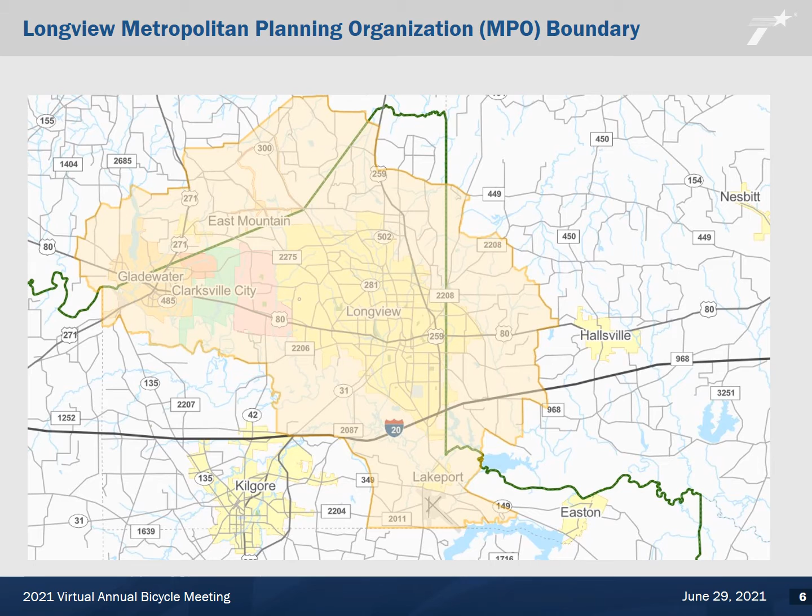So let's start with some projects in our district that are actually under construction, and then we'll move on to some that are being developed or designed.

This first project is in Bowie County, in the Texarkana MPO boundaries in the city of Texarkana, on Summerhill Road. It is a sidewalk project under construction, with limits extending from US 82 to West 10th Street. The description is to construct sidewalks. This project is near completion; it was let in December 2019, and we're currently doing the punch list and completing the project, so it should be fully functional soon. The length of this project is 0.585 miles. We have 2 more projects in Texarkana that we'll move on to next.

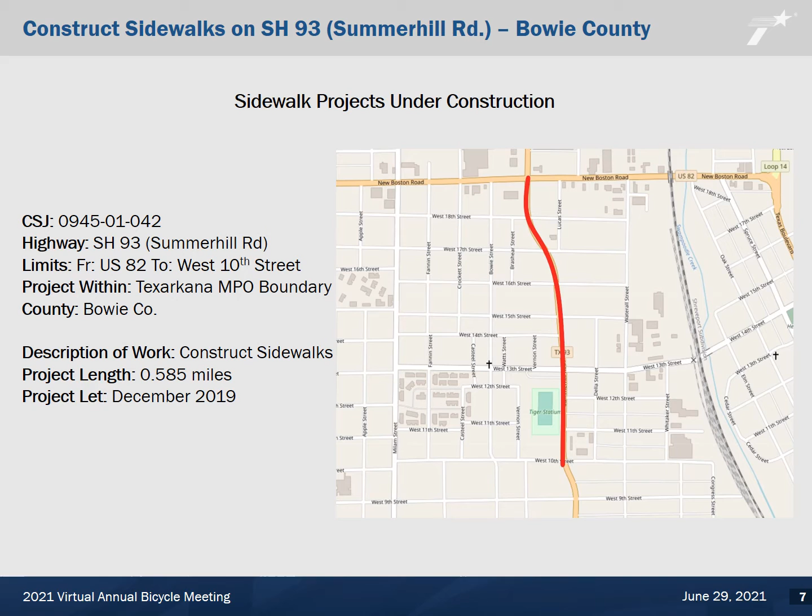This is the second project in Texarkana, also on Summerhill Road. It is under construction to construct sidewalks, again within the Texarkana MPO boundary. This project extends from Meadow Lane to Kennedy Lane and is 0.616 miles long. It also let in December 2019 and is very near completion, with punch list activities underway to make sure everything's taken care of before it becomes fully functional.

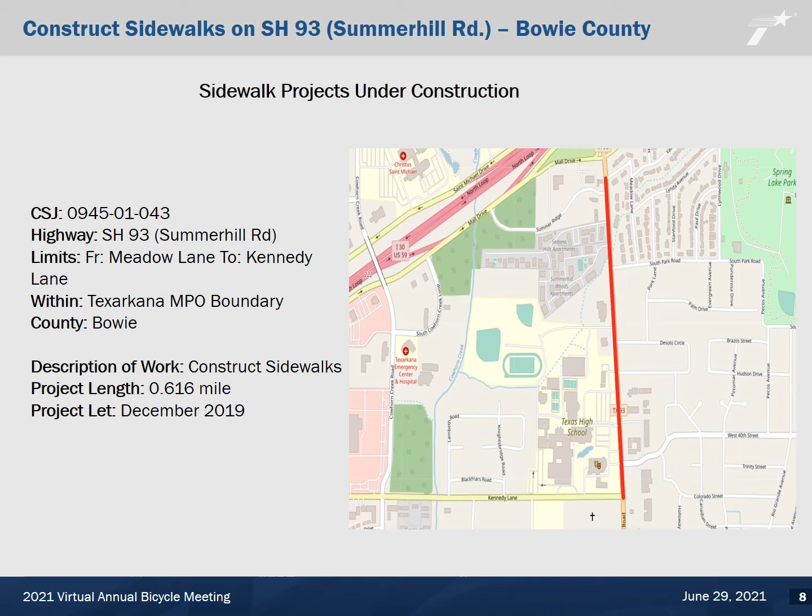Okay, this is the last project we have under construction in Texarkana in Bowie County, again in the Texarkana MPO boundary. This project is on FM 559, also known as Richmond Road. The limits are from North Robison Road to College Drive. It's 0.484 miles long, and it let in December of 2019.

The description of work is to construct sidewalks. We are very near completion. This project is doing punch list type activities and should be fully functional very, very soon.

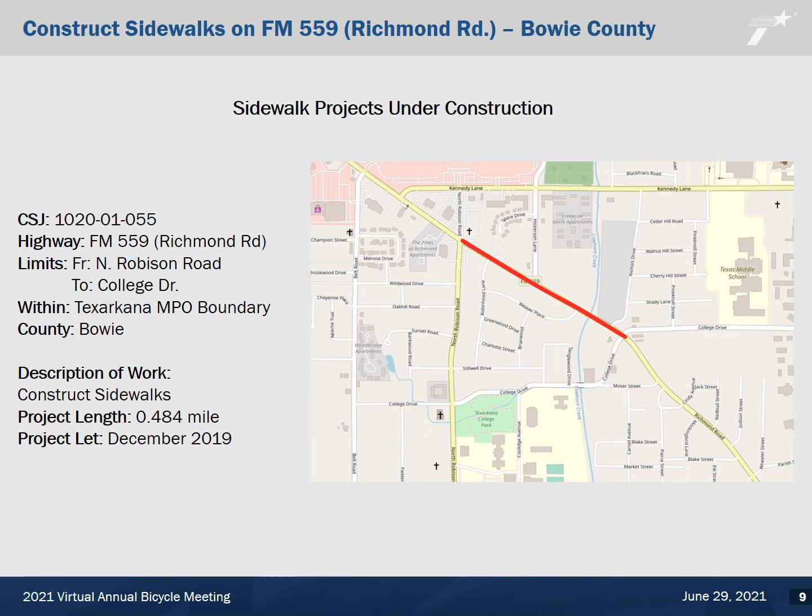That will wrap up our projects under construction in Texarkana. The project on this slide is actually in Harrison County in the city of Marshall. It was selected in the 2017 Transportation Alternative Set-Aside Program. The limits of this project are on Johnson Street, 5 Notch Road, and Positive Place. We're constructing sidewalks for a total length of 0.68 miles, and this project let in May of 2021.

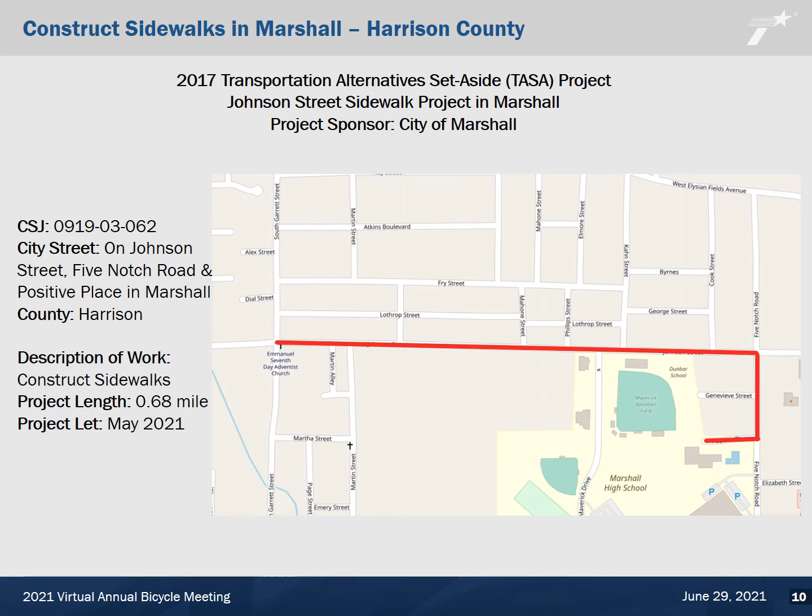So now that we've completed some discussion on projects that we have under construction, I'll begin talking about projects that we have planned to go to construction in the near future.

This first project depicted on this slide and the next is the reconstruction and widening of FM 989, also known as Kings Highway in Texarkana. The project is within the Texarkana MPO boundary, in Bowie County. The limits along Kings Highway for this project are from north of the Interstate 30 frontage road to 3/10 of a mile north of Gibson Lane.

The work will widen the existing 2-lane highway to a 4-lane divided urban section with shared use outside lanes. As will be seen in the next slide, these shared use outside lanes are to be shared between cyclists and the regular traveling public and vehicles. The project is 0.53 miles long, and we are proposing to let this project to construction in April of 2022.

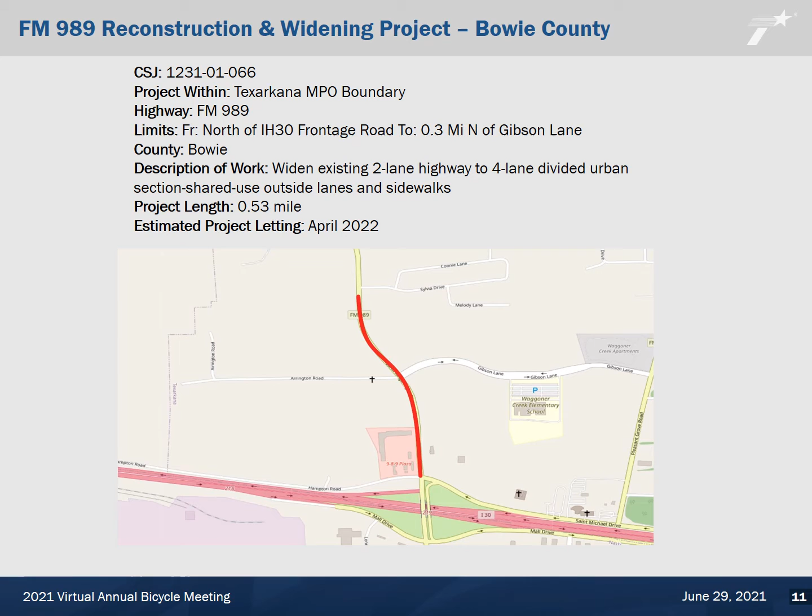So as you can see on this slide, this is the Kings Highway proposed typical section. This is what it will look like when construction is complete in the future. We're proposing to go to 4 lanes, 2 running north and 2 running south, with a center left turn lane. There's also going to be sidewalk on each side, on the west side and the east side of the roadway.

I want you to notice that the shared use lanes are the 2 outside lanes. They'll be a little bit wider, and as you can see in the picture, they're proposed to be shared between cyclists and vehicles, and that's where cyclists will reside. Pedestrians, of course, will use the sidewalk.

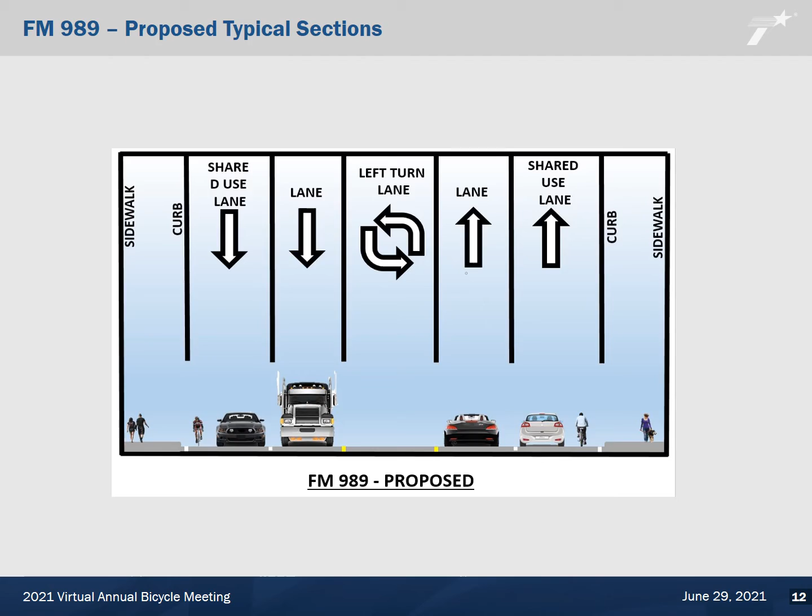So this brings us to our I-30 frontage road project. We're proposing to build frontage roads from FM 3419 to FM 989, also known as Kings Highway. The limits are within the Texarkana MPO. This work will consist of constructing frontage roads, entrance and exit ramps, and turnaround bridges at 989 and 3419.

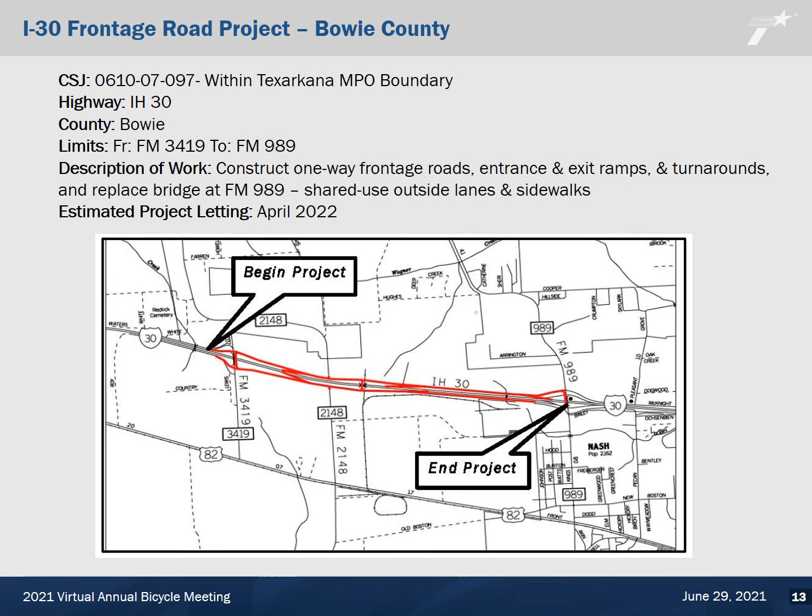There will be a shared outside lane, just like in the Kings Highway project, but there are also proposed sidewalks, or room for proposed sidewalks. We hope to let this project with the Kings Highway project in April of 2022.

As you can see here on this slide, this relates to the previous slide that showed the limits of this project. This is the proposed addition of one-way frontage roads along I-30 from 3419 to 989. In the existing sections, there are no frontage roads. There are some local feeder roads out there, but no formal frontage roads. This project will add those.

In the proposed section at the bottom, you can see we're proposing to add 2 lanes in each direction. The south side of the road will have 2 lanes running east, and the north side will have 2 lanes running west. The outside lanes are shared use lanes, meaning they'll be a little bit wider to accommodate bicyclists as well as vehicles.

We are proposing to widen the crown out to accommodate sidewalks in the future. If we can fund them, we will construct sidewalks within this project, but they may be constructed in the future.

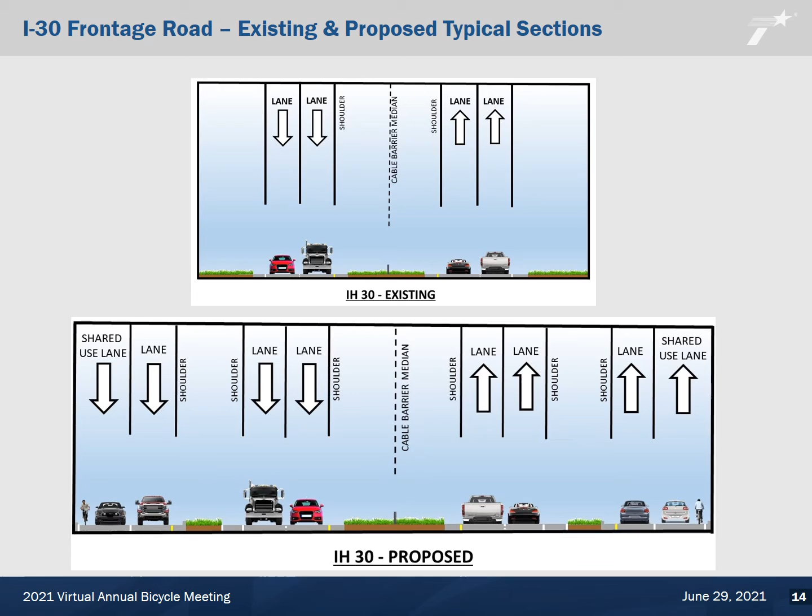Another project selected in the 2019 Transportation Alternatives program is in Hallsville, Harrison County. This project runs along Cider Lane from US 80 to Cal Young Road near Hallsville High School, proposing to construct a shared use path—a wider version of a sidewalk that accommodates both pedestrians and cyclists. The total length is 0.37 miles, and we're hoping to let this project in July of '22.

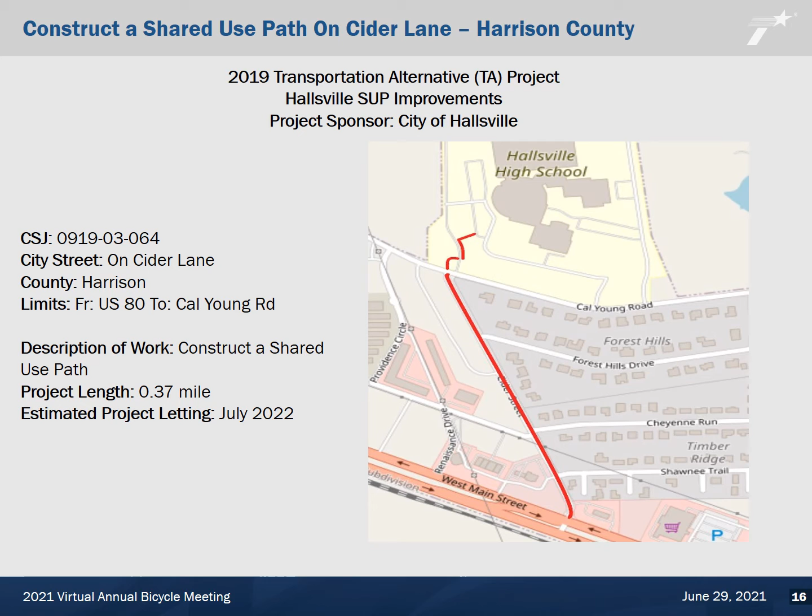That brings us to the next project, along US 82 in Bowie County, which is under development right now. There are 3 different sections—I'll get to those in the next slide—with 4 project numbers total. It stretches in totality from US 259 down to 0.3 of a mile south of I-30 near New Boston, effectively from DeKalb to New Boston. There's different types of work within these limits, and we're hoping to let this project in September of 2024. It includes both pedestrian and cyclist amenities, which I'll describe next.

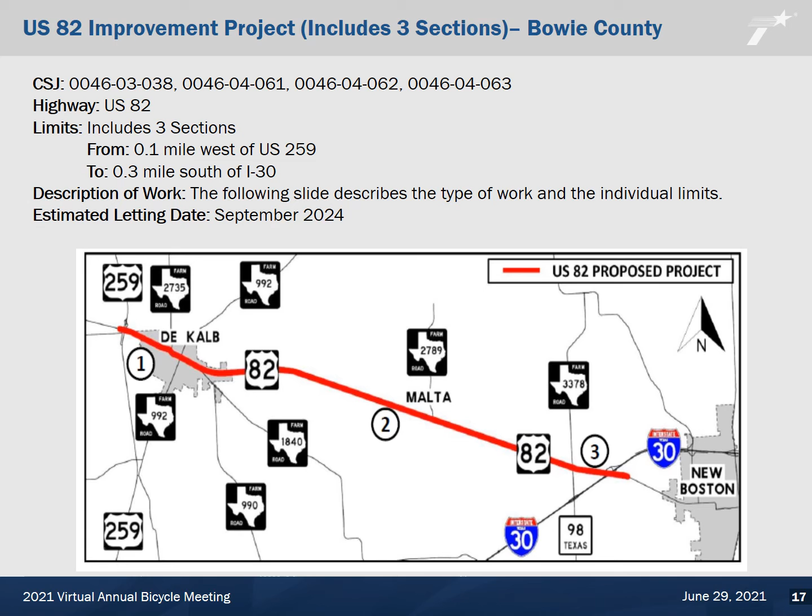This describes what's going on with US 82 from DeKalb to New Boston. We have typical sections I'll show next, with 3 sections total. The first is the US 82 DeKalb section, running from 259 through DeKalb to the south. It includes widening, reconstruction, and realignment of the roadway, with one 12-foot travel lane in each direction and one 14-foot shared use lane in each direction accommodating bicycles as well as vehicular traffic. There will be sidewalks for pedestrians throughout the downtown area, and the drainage design will have a new storm drain feature with curb and gutter. Again, this extends from 259 through DeKalb.

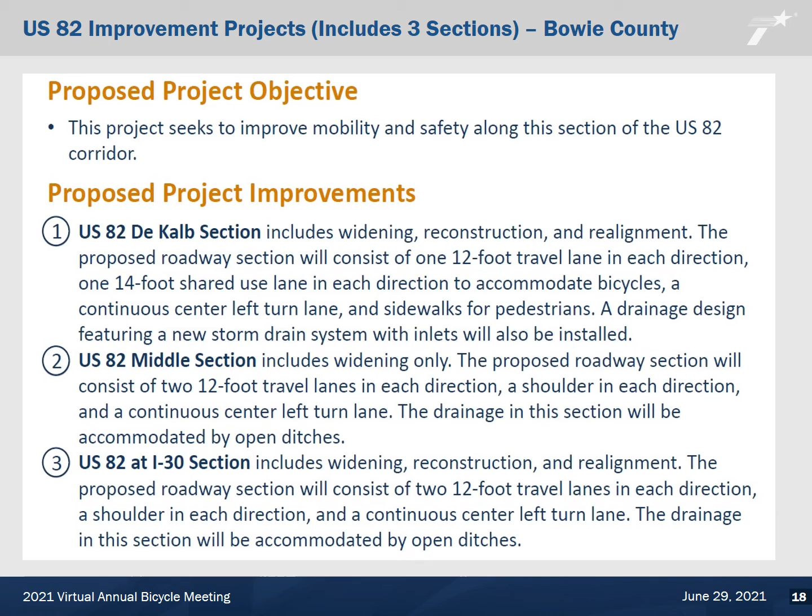Picking up in that rural section is section 2, right outside DeKalb, down to State Highway 98—what we refer to as the US 82 middle section. It's already been widened once to a Super 2. This project will widen it to a 5-lane section, with 2 lanes in each direction and a center left turn lane. The drainage in this section will be open ditches, with a shoulder in each direction to accommodate cyclist traffic. The 3rd section is down near I-30, going from State Highway 98 to 0.3 of a mile south of I-30, and includes widening, reconstruction, and realignment of the roadway. It'll have 2 12-foot lanes in each direction, a shoulder in each direction, and a continuous center left turn lane. Let's go to the next slide to see what we've proposed and what it'll look like.

Again, this covers the 3 different projects, each with typical sections showing existing on the left and proposed on the right. The proposed typical sections extending from 259 to just east of the city of DeKalb will have 1 12-foot lane in each direction, 1 shared use lane in each direction, and a portion with shoulder and sidewalks on each side. The length of this project also has the Northeast Texas Trail on the south side of the road.

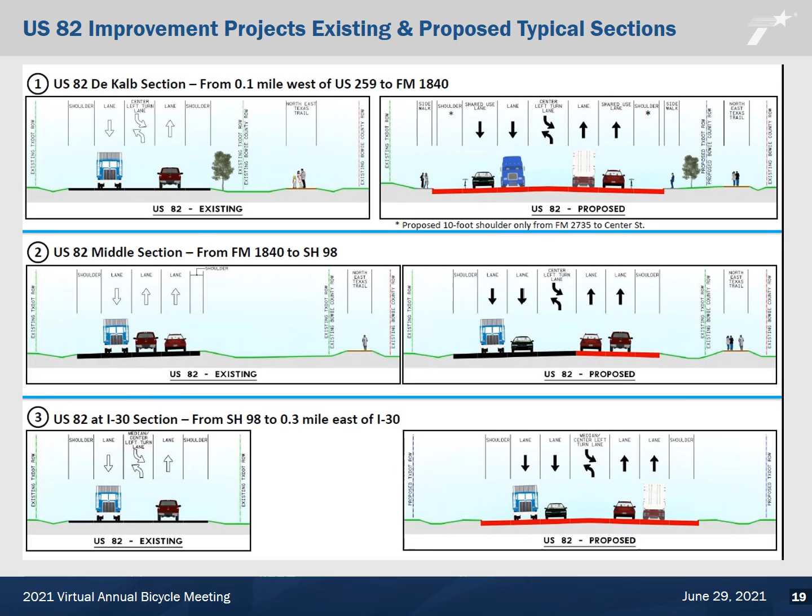Okay, that brings us to our next project. This is also along US 82. It kind of picks up where the other projects left off, but it runs from the Red River County line all the way to 259. This one's under development also. We have a proposed letting date of September 2025, depending on funding for this project.

We're working to widen this road from a 2-lane highway to a 4-lane divided highway with a paved median and 10-foot shoulders to accommodate cyclists. I'm going to switch now to the next slide that shows the proposed typical section so you can see it in more detail.

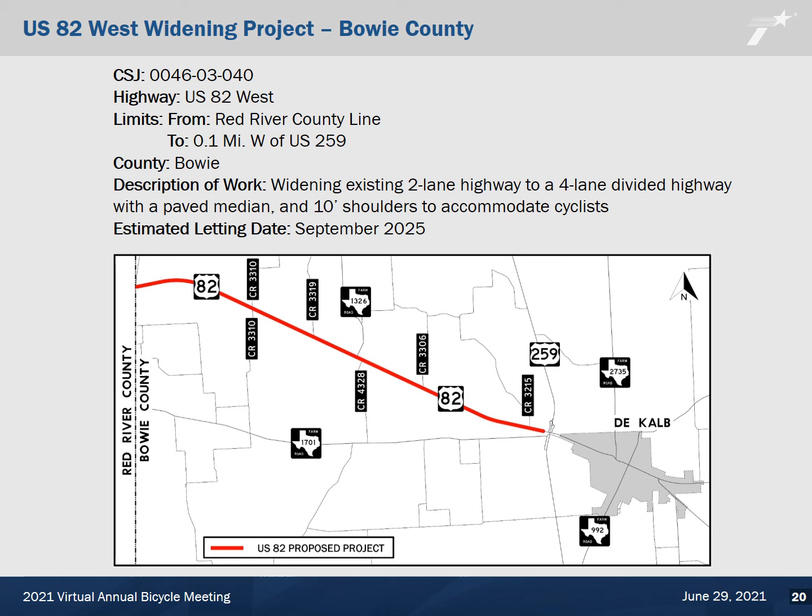Okay, so these are the typical sections of the project that I was just telling you about that runs from the Red River County line to US 259 near DeKalb. As you can see in the top section, the existing section, right now we have 1 lane in each direction with shoulders. In the proposed section at the bottom, we're proposing to construct 2 lanes in each direction with a center left turn lane and shoulder, and the shoulders will accommodate cyclists if they choose to ride on our highways. If you'll notice, the Northeast Texas Trail runs just to the south, adjacent to this project.

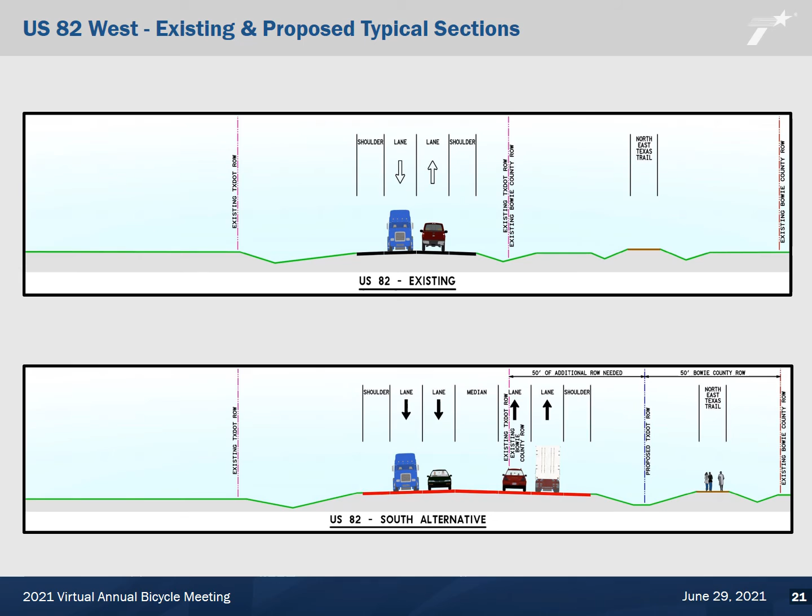So on to our next project. This is the US 82 and FM 989 project in Nash, Texas. We plan to widen both of these roads. In the next 4 slides, I want to talk about these 2 projects. They're kind of rolled into one. It also consists of their intersection as well.

Let's start with the US 82 portion. This portion extends from 9/10 of a mile west of FM 989 in Nash to I-369's west frontage road. It is within the Texarkana MPO boundaries in the county of Bowie. The description of work is to widen the existing 2-lane highway to a 4-lane divided highway with dedicated bike lanes and sidewalks.

So both these projects will have dedicated bike lanes. Right now, the estimated letting date is January 2031. So let's move on to the next slide, and we can look at what the typical sections will look like.

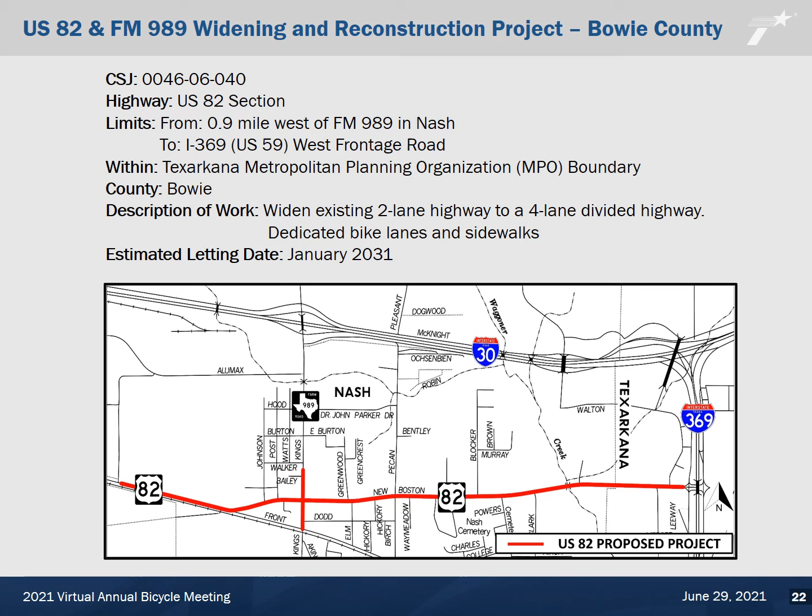So as you can see on US 82 right now, the existing typical section on the top consists of 2 lanes running east and west with a center left turn lane. Once the widening is completed, the proposed section will have 2 lanes running east, 2 lanes running west, a center left turn lane, a bike lane on each side of the road, and a sidewalk. There will be a storm drain system installed, so there won't be open ditches anymore. But we will accommodate pedestrian and cyclist traffic on this roadway.

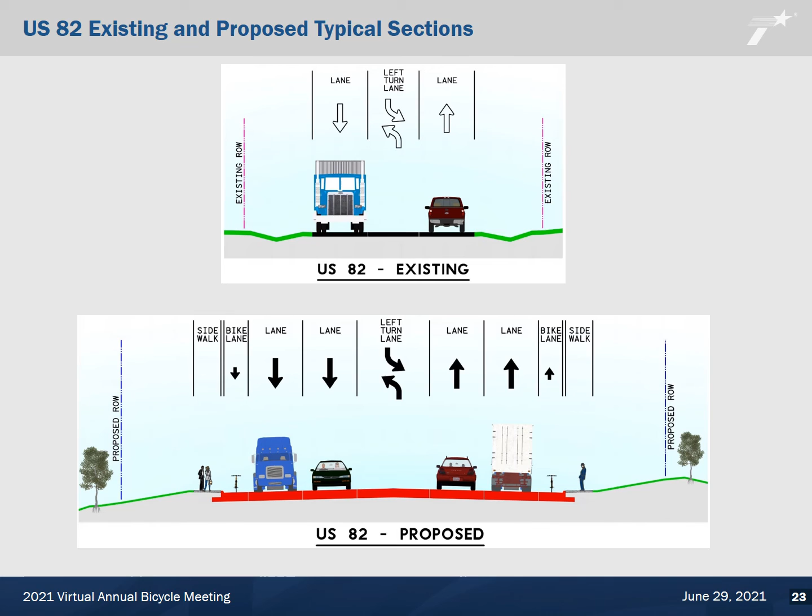So now let's look at FM 989. We'll switch to that slide. So this is the widening of 989, also known as Kings Highway. The limits are from the I-30 South Frontage Road to 1/10 of a mile north of US 82. Again, it's also in the Texarkana MPO limits or boundary. And we are planning to widen FM 989 from a 4-lane undivided highway to a 4-lane divided highway with dedicated bike lanes and sidewalks. The estimated letting date pending funding is January 2031.

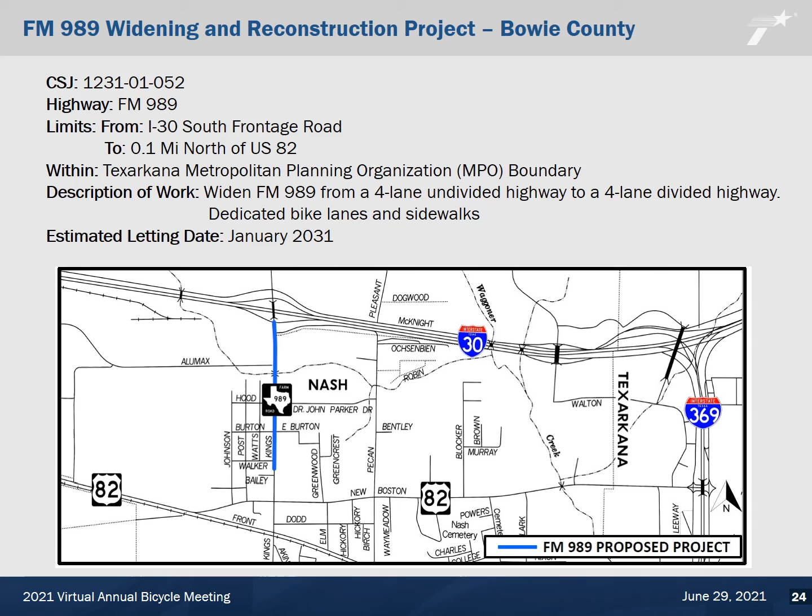The typical section on the top is the existing typical section. It shows 2 lanes in each direction for 4 lanes total. 989 runs north and south. On the proposed section, when we're done with construction, we will have 2 lanes still running in each direction, as well as a center left turn lane, 2 bike lanes on each side of the road, as well as sidewalks. There will be a storm drain system installed on this as well, with no open ditches.

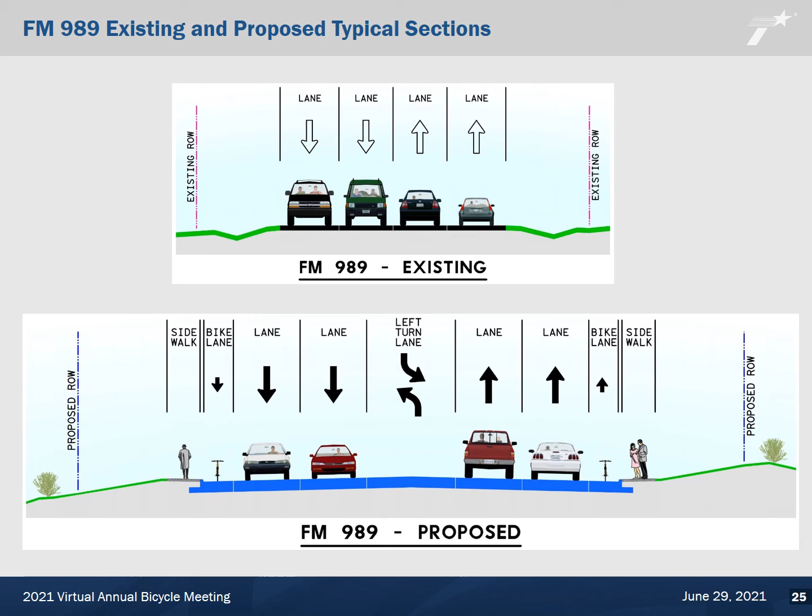So the Nash project kind of wrapped up our projects that are under development. So now we've talked about projects under construction and projects under development, and now I want to introduce you to two projects that we will be moving into development.

They have been chosen recently. They were part of our 2019 Transportation Alternatives Program. The City of Texarkana submitted these projects, and they were considered and chosen recently, so we'll start to work with the City of Texarkana to develop these projects.

The first project seen here is along College Avenue. The proposal is to construct sidewalks and bicycle lanes along both sides of College Avenue from Robison Road all the way to State Line, also known as US 71.

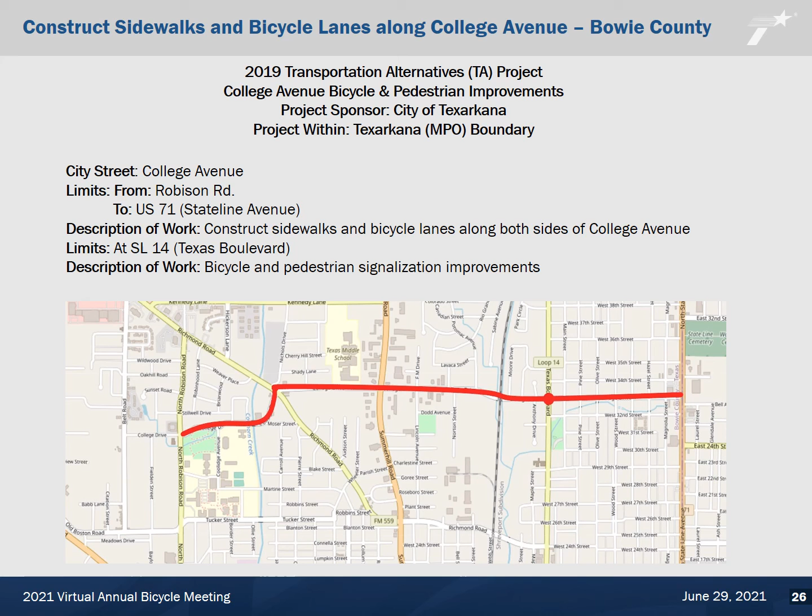In addition, at the intersection of Texas Boulevard, they're proposing to update the pedestrian signalization, bicycle and pedestrian signalization. So that will be an improvement at that location, but all of that will be encompassed in this one project.

Let's move on to the second one. So this is the next project that was chosen. It was also submitted under the 2019 Transportation Alternatives Project Program. The City of Texarkana submitted it.

This project is along North Robison Road, and it extends from Bright Street to Richmond Road, and there are some more parts on the next slide I'll show you. So it's not just this road, but there's more we'll get to.

The proposed design is to construct sidewalks along both sides of Robison Road, and there will be some crosswalks considered, as well as updating some existing signals.

So like I said, these have not started development yet. We are looking forward to getting started with them, but I wanted to share the limits. Again, this is the Robison Road portion. So let's move to the next slide.

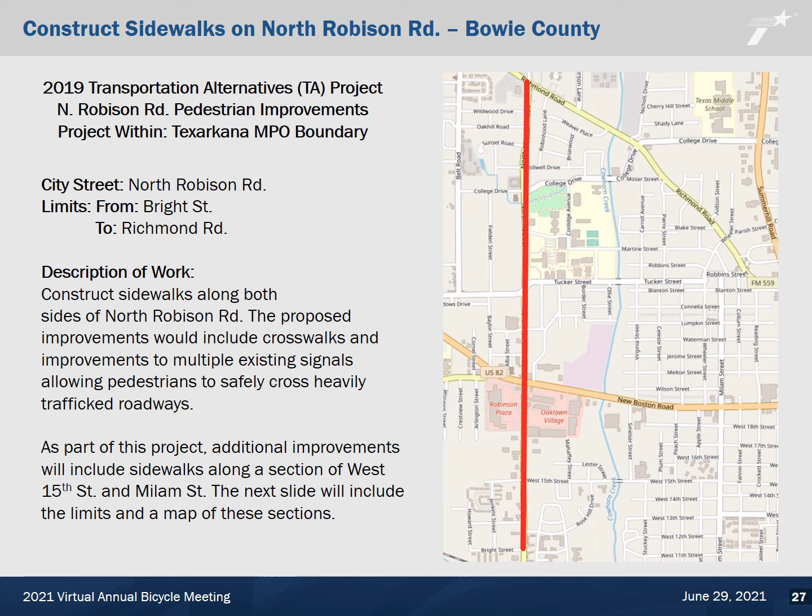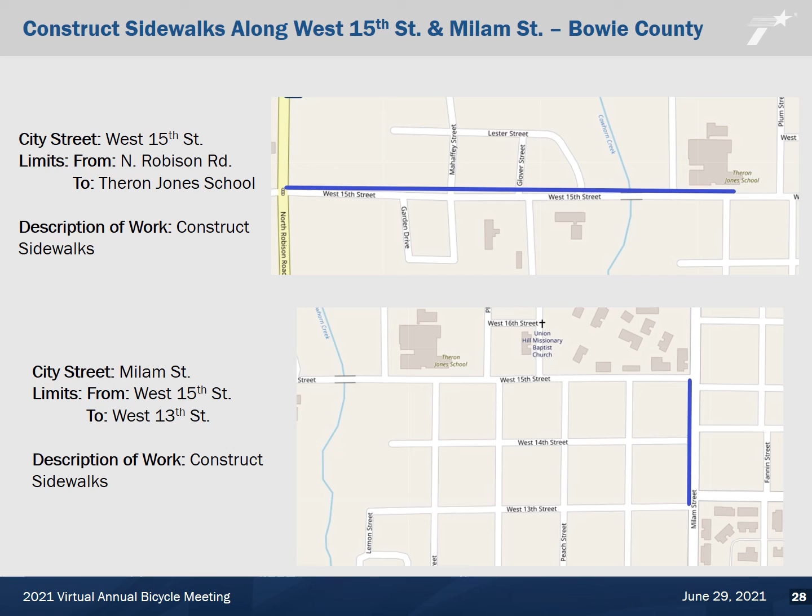So that kind of wraps up the projects that we have under construction and development, bringing us to the end of our presentation here.